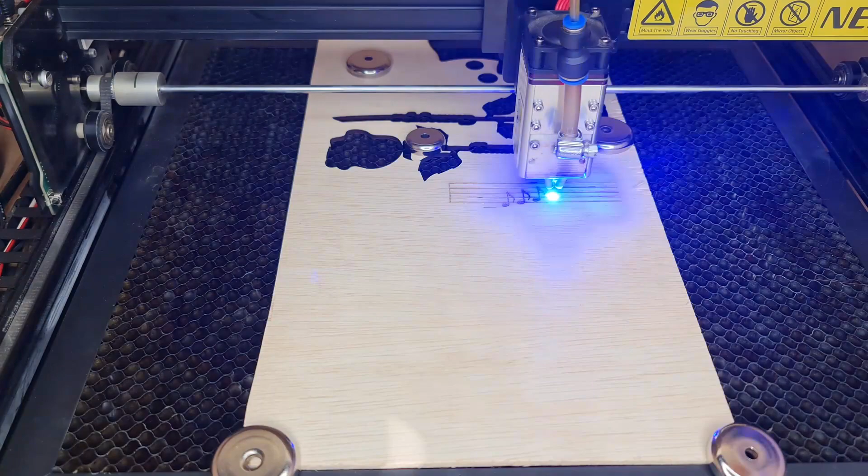Today I'm going to show you how to resume or recover a project after a power outage or any other kind of failure in LightBurn. Without further ado, let's get into it.

Before getting into the actual process, I just want to emphasize that at the time of recording this video, there is no proper method for recovering a failed project. So what I'm about to show you is basically a trick that works and can help you recover at least some of your projects.

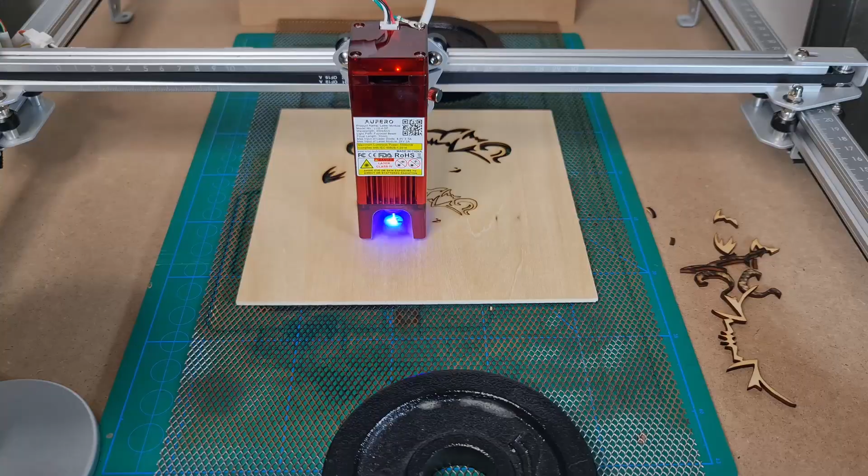Now, let's try to highlight the problem. You're running a project and suddenly you get either a power outage or a disconnection, or simply the machine stops for a random reason that goes beyond the scope of this video.

Now, the sudden stop is uncontrolled. That means that the axes are not slowed down and stopped in a controlled manner, but de-energized at once. And so this causes the machine to lose velocity and eventually stop somewhere without the ability to keep track of its position. This is actually the difference with pausing.

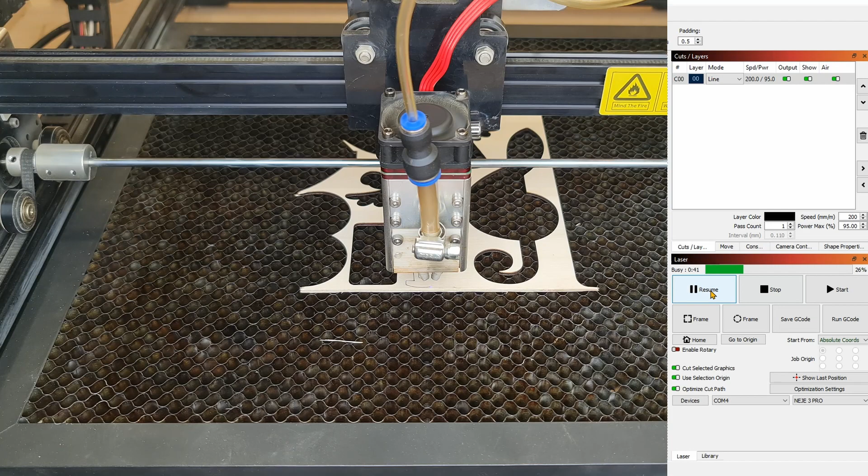When you click the pause button to pause the execution of a project, the controller sends the signal to the stepper motor to slow down in a very controlled manner until it stops. Despite these small machines not having feedback, the controller is able to remember the position. And thanks to that, you are also able to resume.

Currently, laser engravers do not offer a way to resume a project the way 3D printers do. At the same time, LightBurn does not offer that functionality either. Hopefully newer machines will come out with some way to resume projects, and LightBurn will also align to that. Despite LightBurn not offering the recovery option just yet, we can take advantage of the preview window, something that in my view is very powerful.

Using the preview window, we can basically try to reposition the machine and restart where the job or the project stopped. Now, the procedure changes a little bit depending on what type of machine you have.

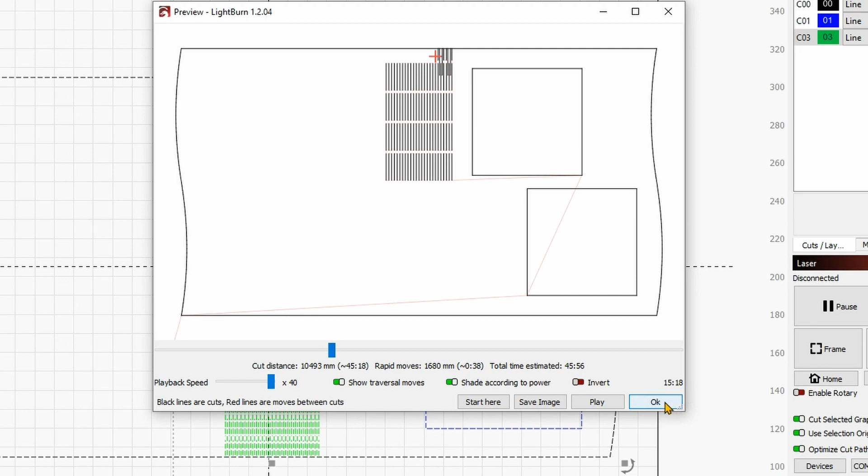In particular, if your machine has a home, that is micro switches representing the origin of the coordinate system, and if it doesn't. Let's start with a machine having a home, meaning micro switches that allow the machine to return to a fixed known position.

When working with this type of machine, I normally recommend, and it's very important, to work in an absolute coordinate system, and before starting a project, to always start from home.

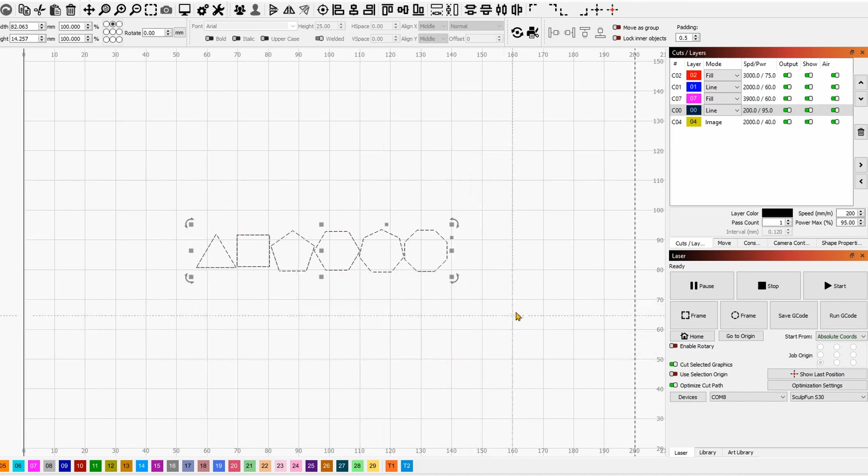So once you have your project selected, you frame it — this will show where the project is supposed to come out. Before actually clicking the start button, it is highly recommended to home back, and then click the start button from home.

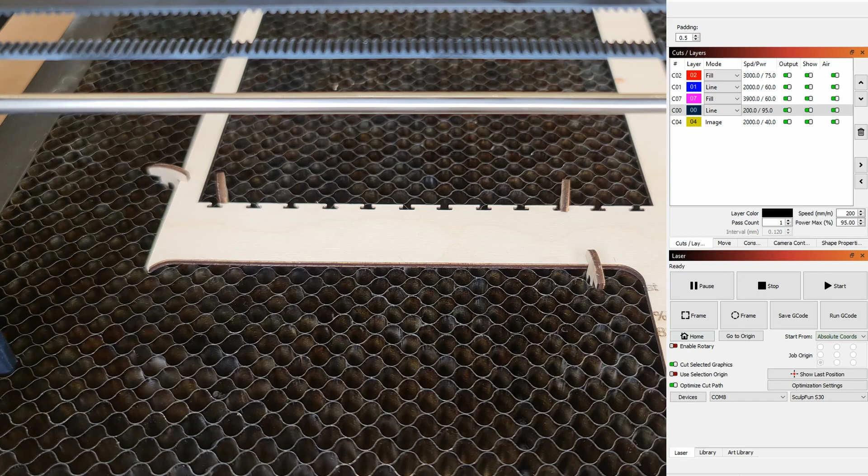This is because while the machine works between cycles, it loses accuracy over time. So starting from the home position will make sure that the precision, the accuracy, is the highest possible at the moment. Now let's start with something pretty simple and straightforward.

These are a bunch of individual shapes. By the way, in order to work only with what you have selected, make sure that you have 'cut selected graphics' toggled on. So let's go for it.

I've already homed the machine, I have already framed it, and let's click on start.

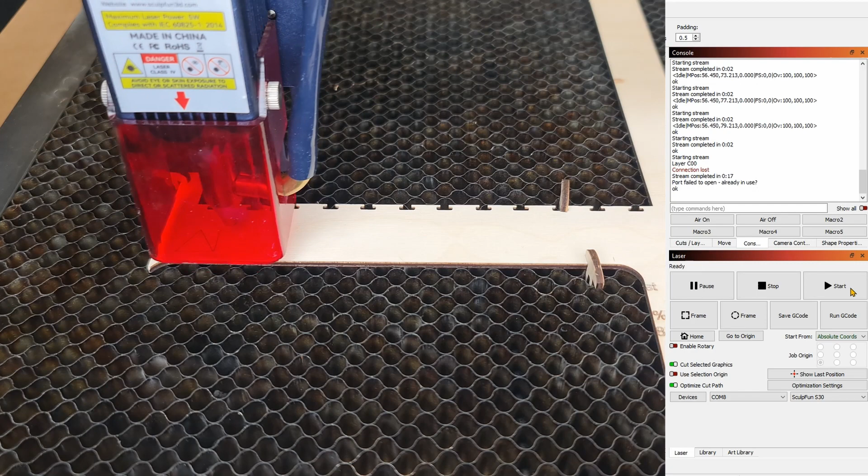All right, so now I'm going to simulate a power outage. There we go — I've disconnected the cable, which you can see over here, and now I'm going to reconnect it. This will auto-home, because obviously I didn't have a real power outage, so my PC is currently still working.

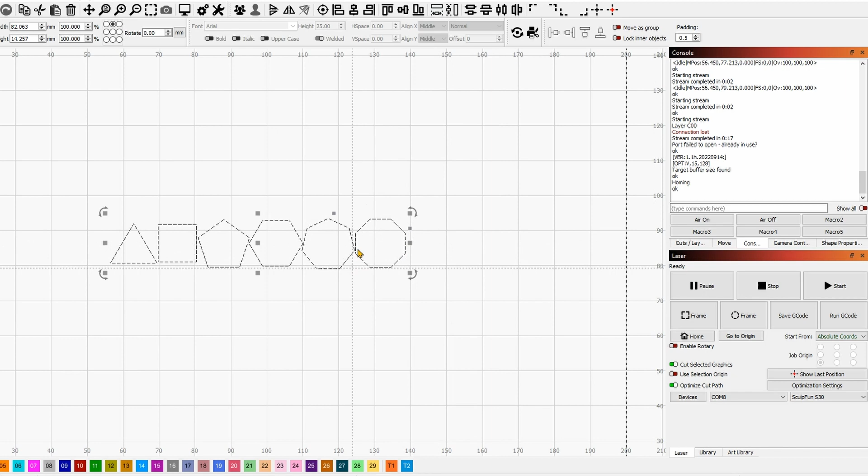Now you get feedback in this case that there was a USB connection dropped. There is some hint here on what you can do, but not exactly how to recover, so I'll simply click 'no'. Now, what you could do in this instance — first thing first, once you reconnect everything, make sure that you home the machine.

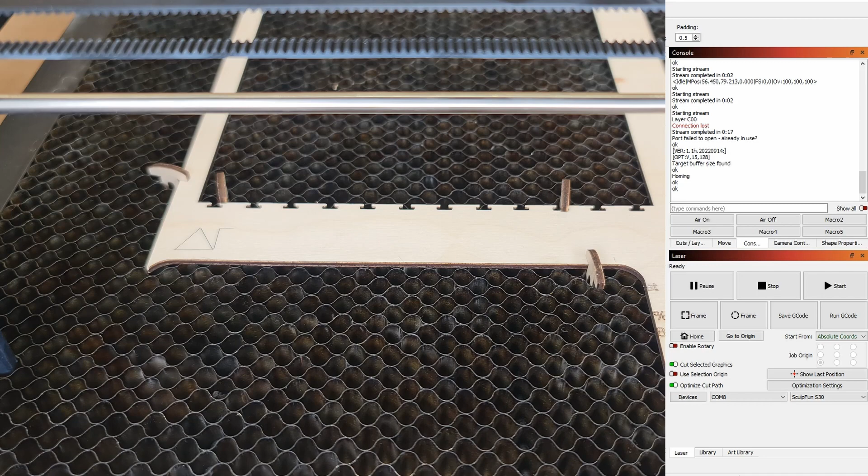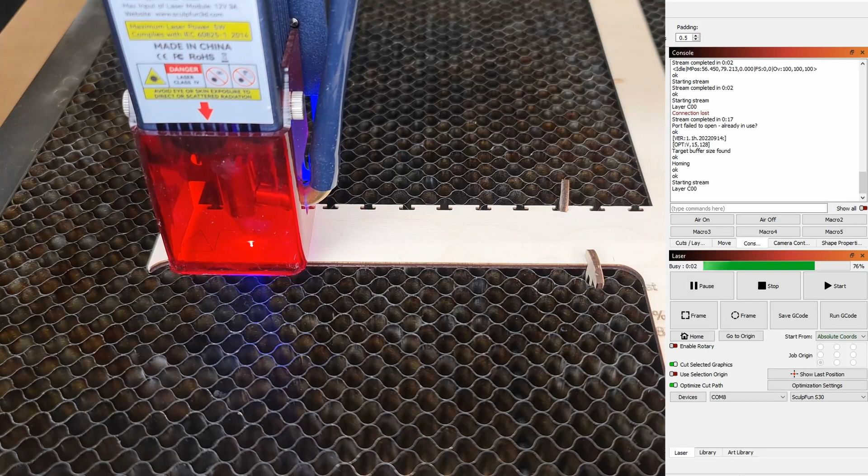In our case it was already homed. Now have a look at the condition of your project, the status - where did it reach? Now I know that this was the object being cut or worked on at the moment of the failure. So what I can do very simply is select the remaining ones and click start and let it finish working. By doing so, there will be only a small percentage of the project that actually fails.

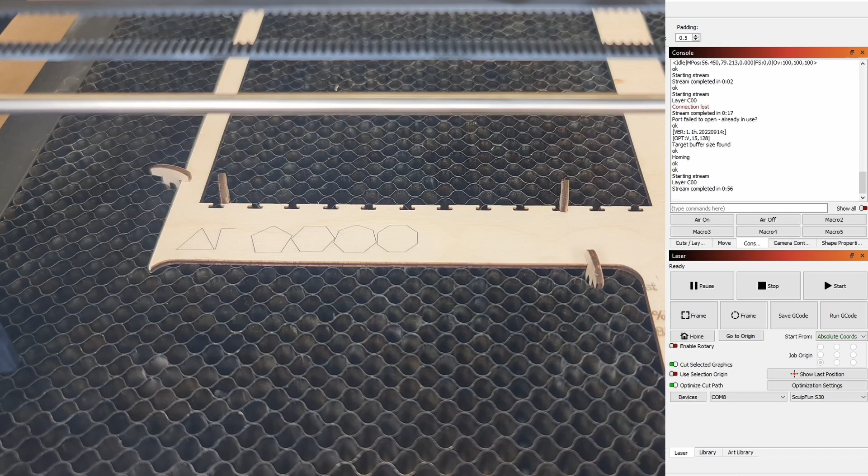All right, so as you can see, we have our project recovered in large percentage. However, we can actually recover this entire project, but I'm going to show you the procedure with a more complex project - one with both engraving, fill engraves, and cutting.

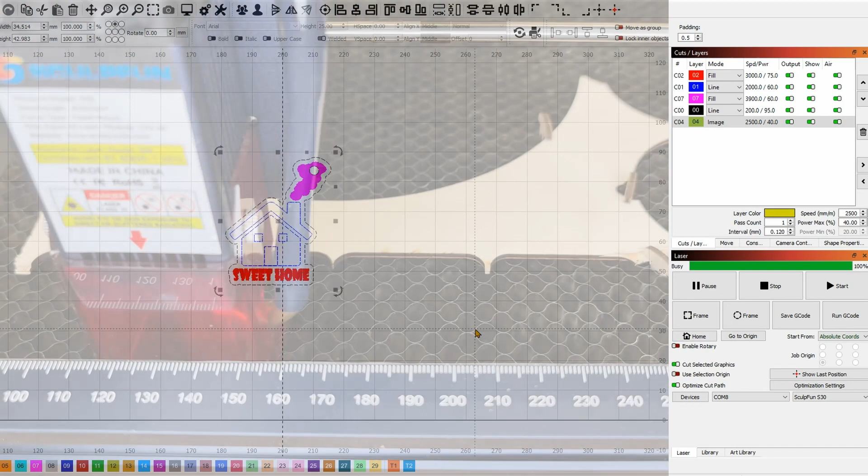Once we framed it, let's once again not forget to home the machine. Let's always have our origin. And now we can click on start.

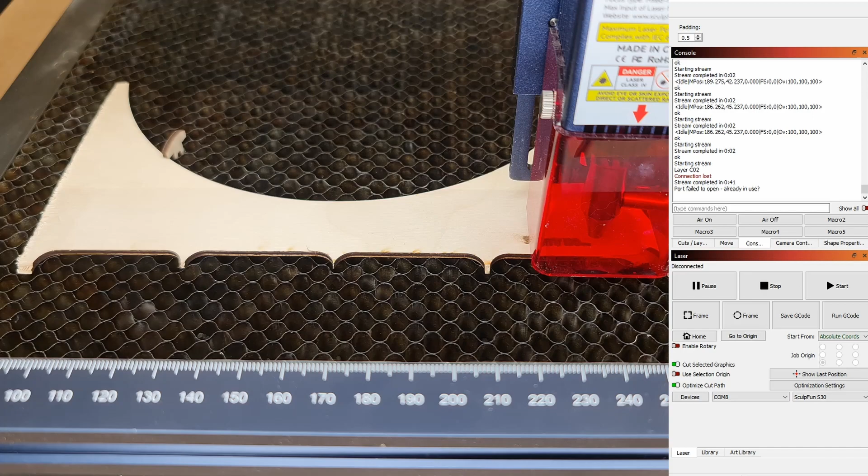All right, let's randomly stop. Now before reconnecting everything, let's try to see where it is - just like this, let's try to identify where it is. And now let's plug back in. If your computer didn't shut down, this will automatically reconnect and home the machine for you.

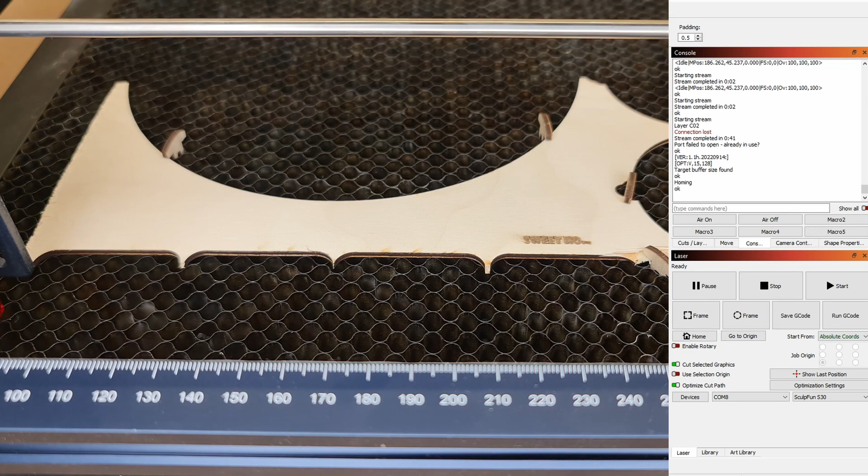And now we need to check exactly where we are in the project, so let's take a closer look. You can see here, with 'home' - we were just engraving the M of 'home'.

Back to LightBurn, as you can see we get the message. Just click on no. Let's select our project and preview it once again. So we said we are approximately at the M of 'home'.

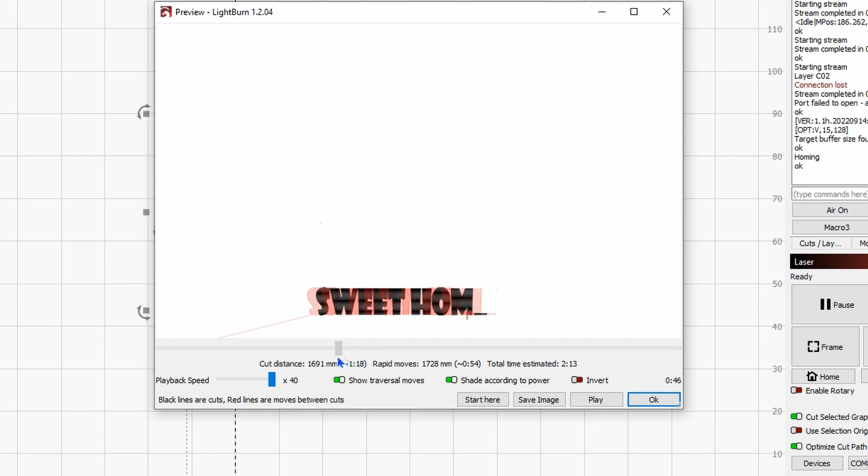We have to now understand exactly where we are. In my opinion, we are somewhere here, so I think I can give it a try. And so, click on start job on laser from here.

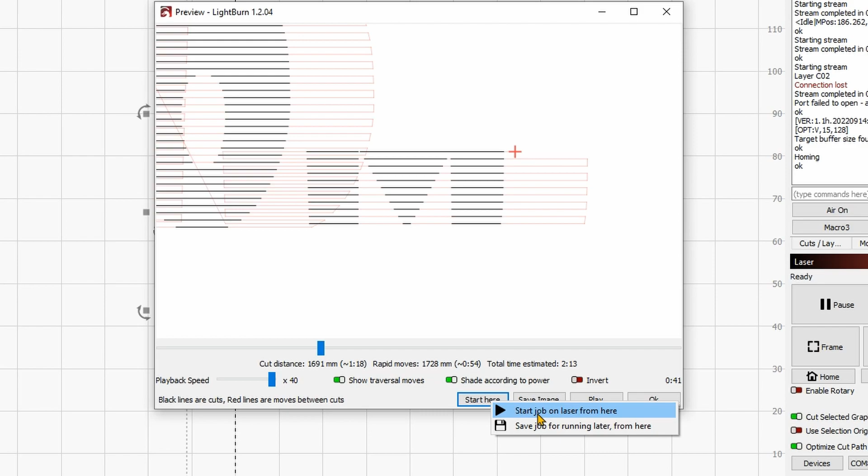Now, as usual, let's not wait for the entire project to finish. Let's let it run for a while and have a look if things are good. If they look fine, we can leave it to run because the project is actually okay. I can see there is a tiny defect, but it's not much visible, so I will leave it to work.

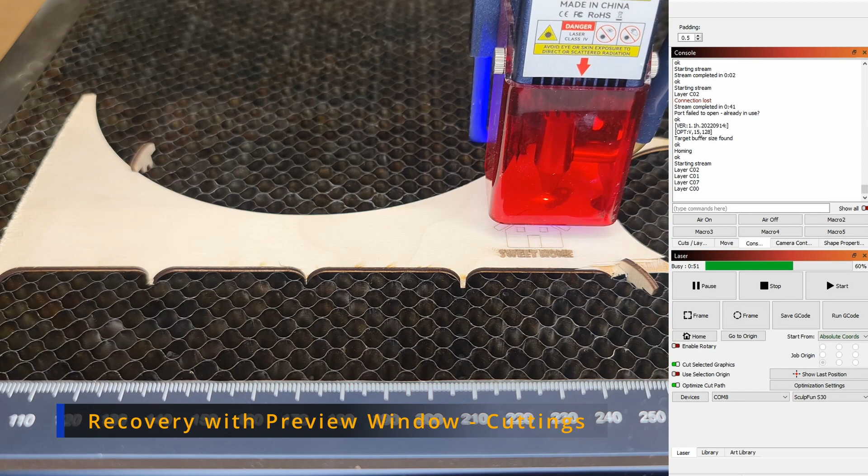All right, so let's now randomly disconnect, and let's reconnect.

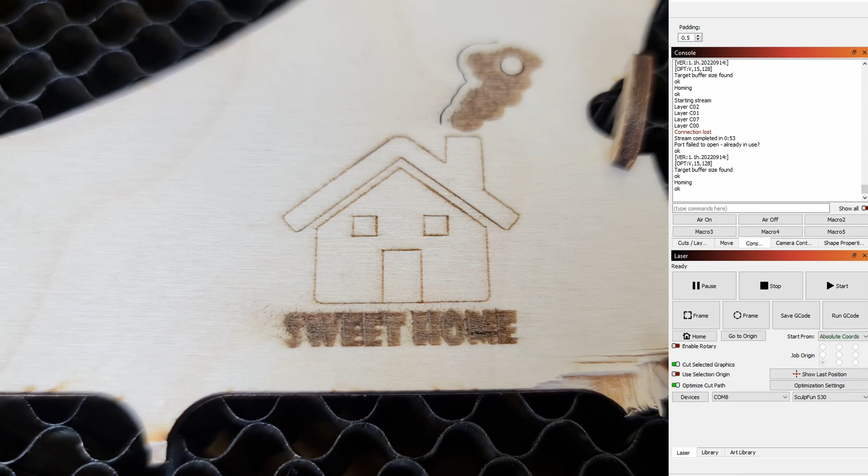So let me give you a closer look. This is where we are, you can see over here. So we will now try to reposition ourselves there. Try always to get some reference point so you can understand in the computer where you are.

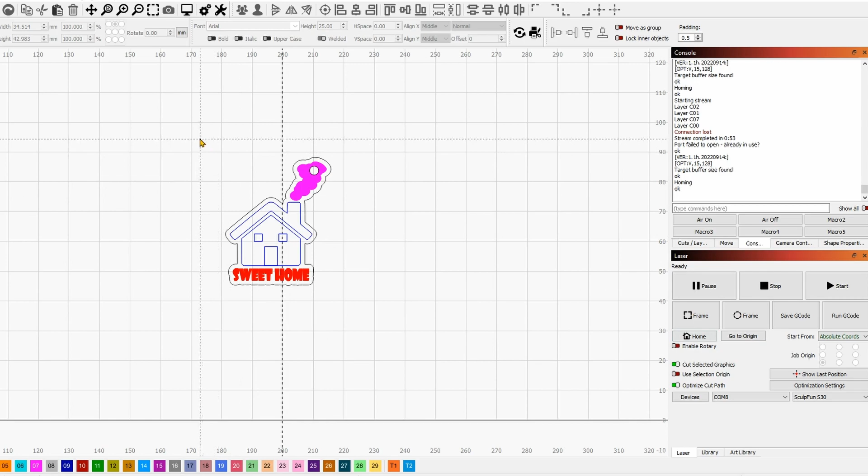So back to LightBurn, click on OK. Now again, the machine has already homed, otherwise you would have homed it yourself. Now click your project, preview, use the slider to locate where you were. Now it seems like we were here, okay?

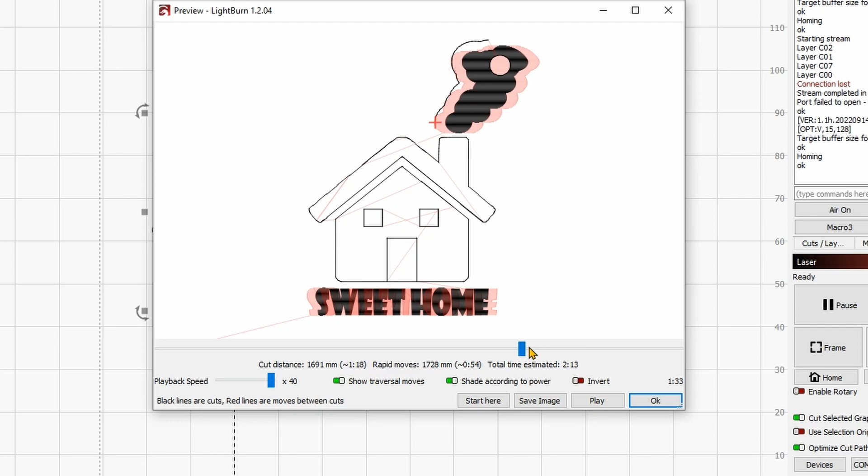So like we were at this point, in this location. Now since it's a cutting, you can retrace a little bit more - that will not be visible. So I'm thinking to start somewhere here, maybe like this. Let's use the scroll wheel on the mouse so we can fine tune it. Okay, and once you're happy with it, start job from here.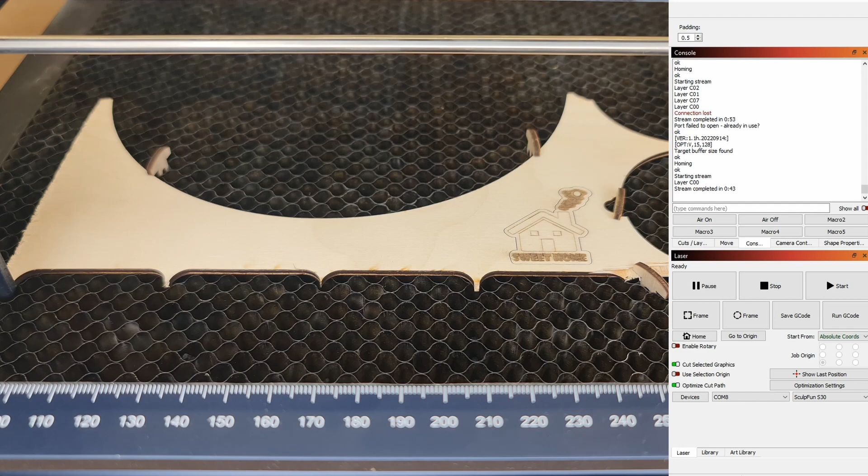All right, let's see now what happened. So far, I don't see any defects.

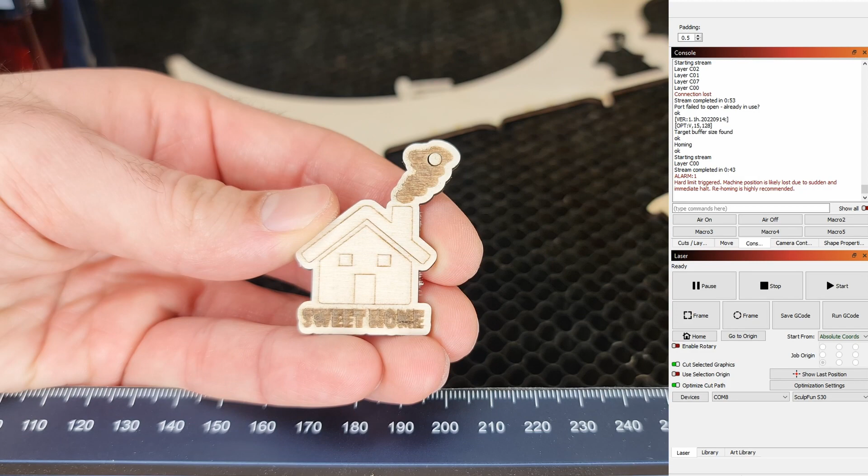And we can try to also break it. You can see over here that this project has failed twice, and we are almost unable to recognize the failure points. At least for the cutting, I don't see anything. For the small E of 'home', there is a slight imperfection - I don't know if the camera can actually render that. But overall, I don't think it's going to be something noticeable.

All right, so now we are going to try to recover the hardest type of project, and there is an image. Now, the reason it is hard is because it is hard to actually pinpoint where exactly the machine stopped. This is highly dependent on the type of image, the amount of details, and the resolution. But we are still going to give it a try so you can see how I would work around that.

Now, important here is that you will need to set your image layer. When you double click on it, you will need to set it to fill shapes individually. This is going to allow you to use start job from here, from the preview window. Okay, so let's give it OK.

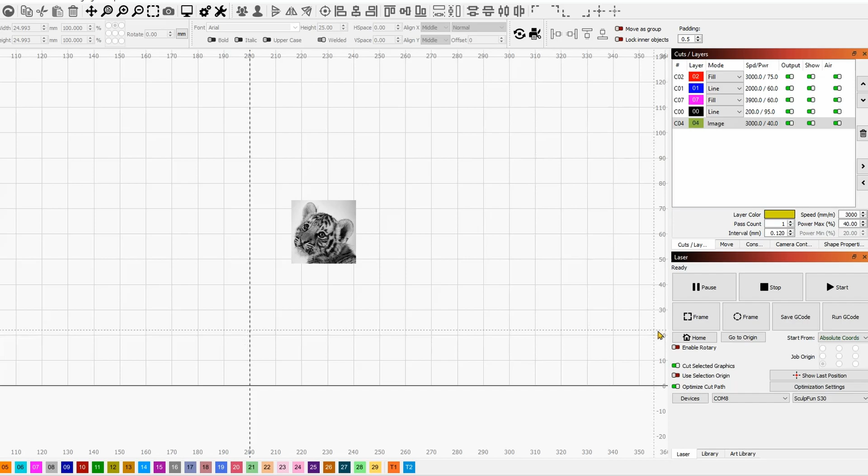Now, don't forget again to home the machine before everything. Once you're ready, select it and click on play or start.

All right, so now I'm going to stop it at a random location. Again, here is the cable. And let's reconnect.

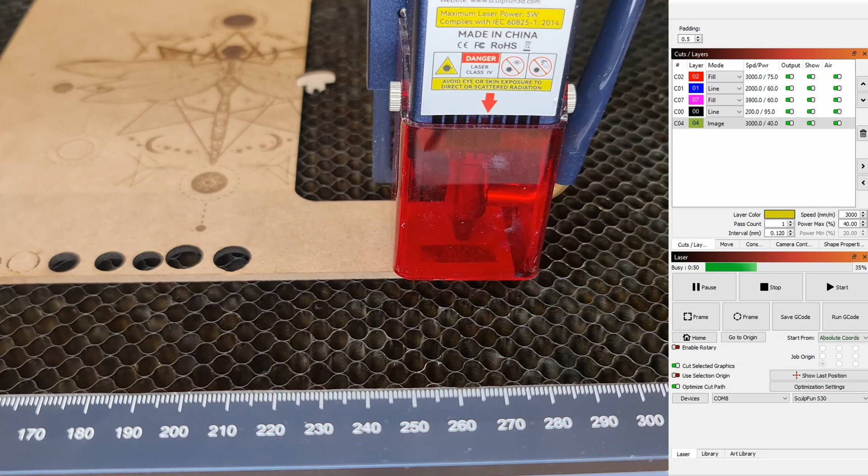Here it is very important to have a look at the project and try to pinpoint the exact location where the machine might have stopped. Okay, let's go have a closer look.

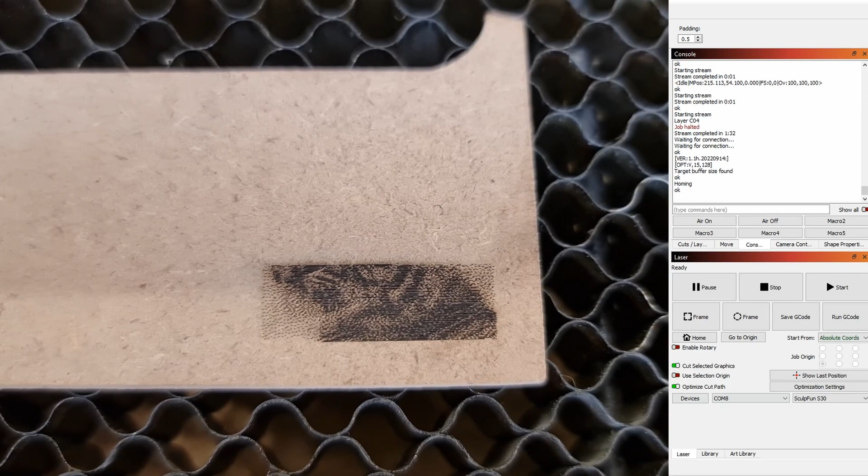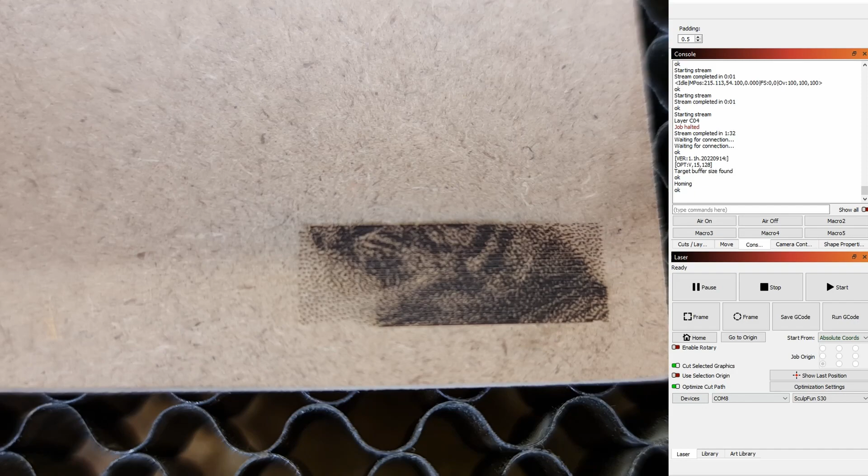All right, so this is the current status, that's where we arrived. I can see a little bit of the fur on the nose here, and I think I can see the part of the nose and a small detail over there. But we'll need to try to figure out small details that we can use ourselves to position the cursor on the screen. All right, so back to LightBurn.

Let's select the project, let's preview it, and let's use the cursor over here. Now I see a little bit of this fur or hair, not sure how to call that, and some detail over here, over to this location. I will try to be as precise as possible.

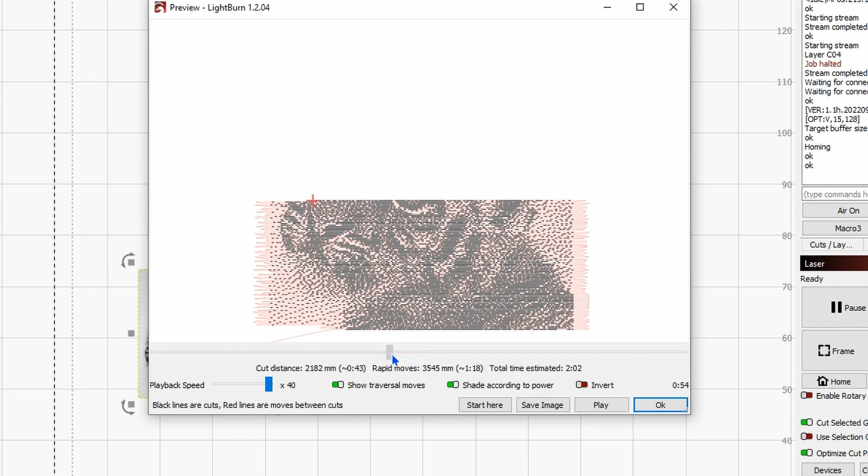Now bear in mind that here you might end up with three situations. You're lucky and you pinpoint the exact point, so you will not have a noticeable difference. Second is that you will have skipped lines, meaning you picked up the wrong line and skipped some. Third is that you will have a burned line, meaning you are going to trace back a line that was already engraved before the machine halted or stopped.

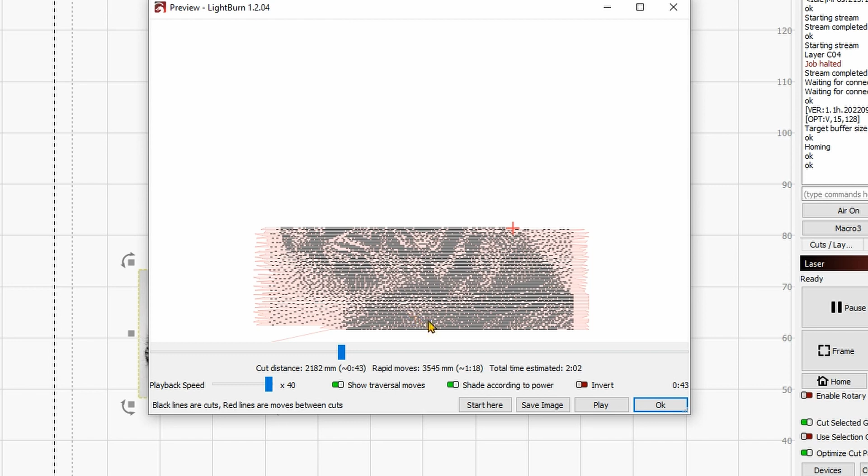Okay, so this is unfortunately the problem with the images, but still let's try to see where we can, maybe somewhere here. Let's see what happened. So, start job from here.

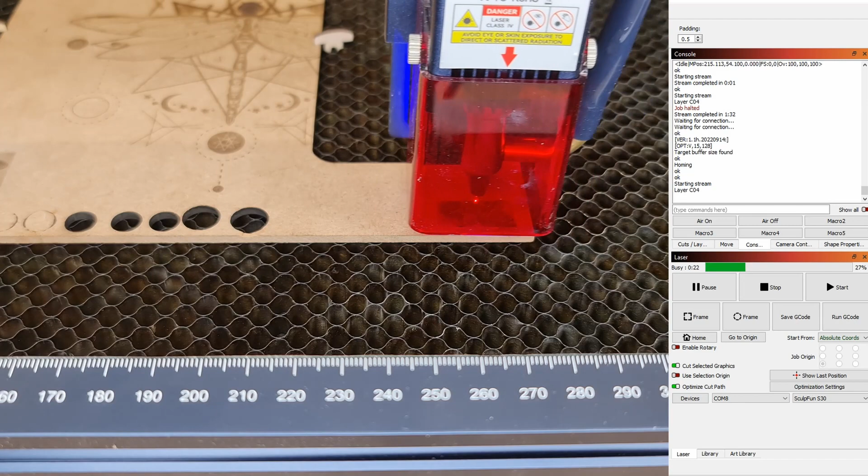Now again, let's try to have a look at what is going on. Let's leave it to work for some time and try to figure out whether the project is being executed correctly without visible abnormalities. If it does, we'll leave it to work, and that means we save the project. If it doesn't, unfortunately there is not much that we can do.

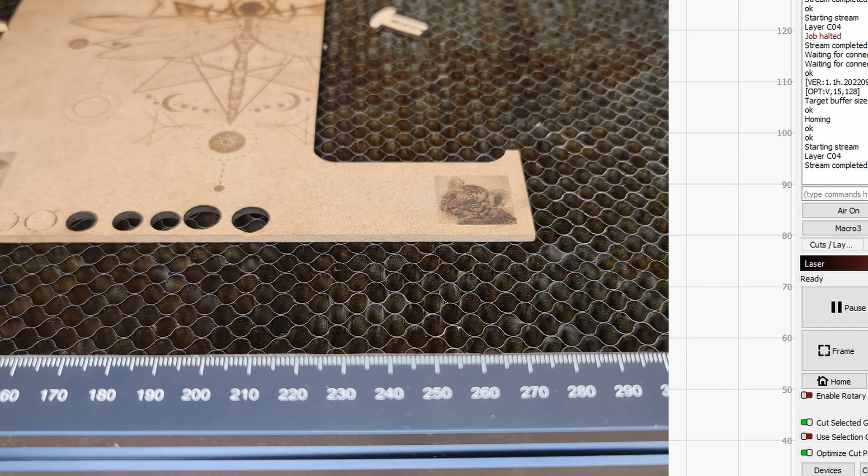Right, so from what I can see here, all seems good. Now we are going to have a closer look. I don't see any noticeable defect, which means that we've been very lucky.

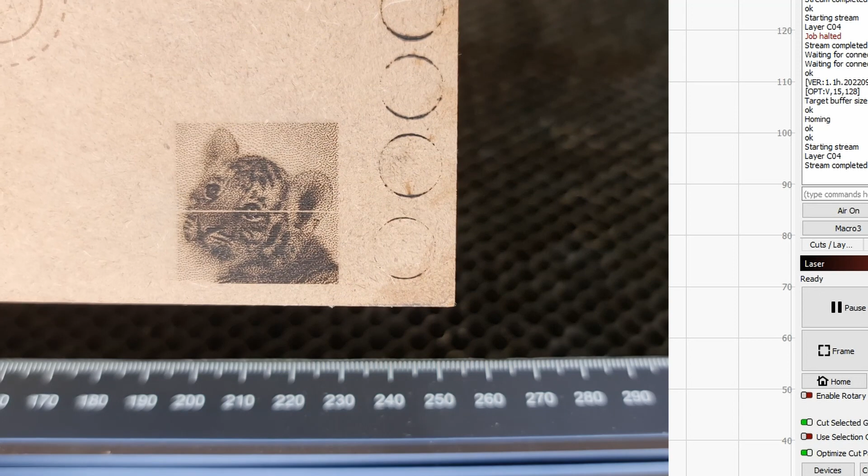I will show you the previous one that I was trying for this video tutorial, and as you can see, I skipped one of the lines. I could have also tried to recover that, but unfortunately when the laser head backed up, it hit onto one of the clamps, which shifted the sheet, and so the entire project was ruined, because realigning it is a nightmare. But here, as you can see, we got very lucky and the project is clean. I mean, I don't see any defects there.

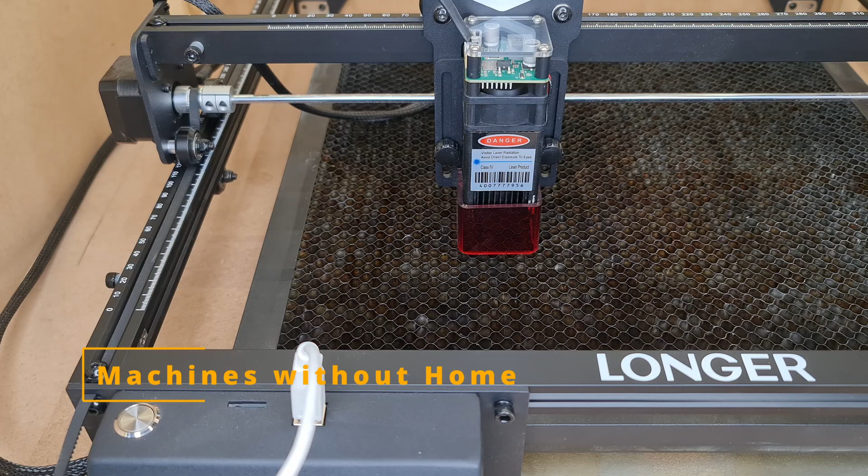All right, how about recovering a project with a homeless machine? That is a machine without micro switches, which means a machine that doesn't have a fixed reference point. Now, rather than showing you how hard it is to actually recover a project in that kind of situation, I'm rather going to give you and show you some recommendations on how to work with a homeless machine, so that you can apply the methods I showed you earlier for a homed machine.

Now, the first method is to try and let your machine work like if you had the home. It is true that you don't have micro switches, but it is also true that you have a physical frame that represents the boundary and therefore the physical limitation of your axis, which can actually be used as a reference point. So what you can do is work in user origin as your coordinate system. And when you start your machine, you can either move or jog your machine to a corner, let's say for example the bottom left corner, so that you have this physical contact representing your machine's 0 position.

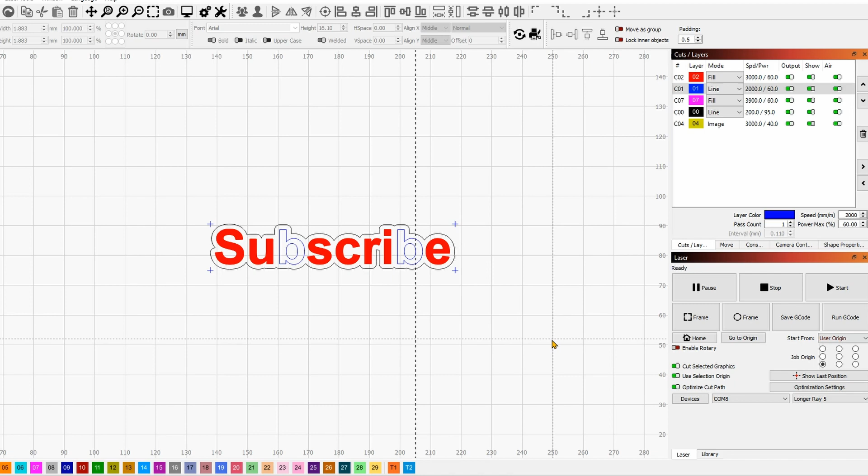So you could either go to the move tab and jog this down until you actually hit the frame, or you could manually move it. So you can go down, and as you can see, I've touched already, and there we go. Now I'm on the corner.

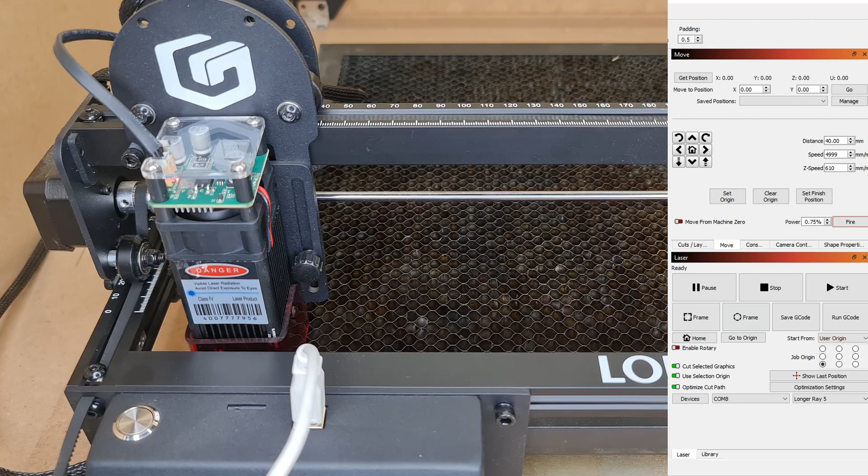And I can come over here and click on set origin. Now we can use our user origin, so we can randomly jog somewhere, and then rather than clicking home, which isn't enabled anyway, we can click on go to origin.

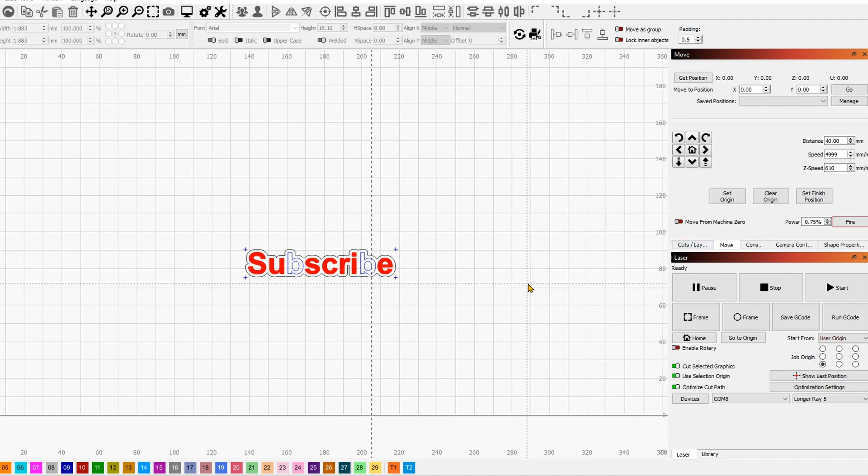Once you do that, before you start your project, or anyway once you start your machine, it is going to act like you have a homed machine. However, if you want to work in the current position, meaning you want to move the laser by hand, then I suggest you create corners outlining the bounding box of your project.

So when you select a project, I can select now only the outer part, you will have a bounding box represented by the minimum and maximum in both directions. That is what the machine is going to trace out when you click on the framing button.

So what you can do is manually create this simple axis, just to draw them. And then you can put them in an independent layer. That's what I suggest you do.

Then you come over to the layer and move the layer to the top, so that is going to be first, because you want to make sure that whenever it fails, you will already have your locations here.

So what happened here now, if we highlight it all and go to the preview, you will see that these are the first part that are going to be engraved.

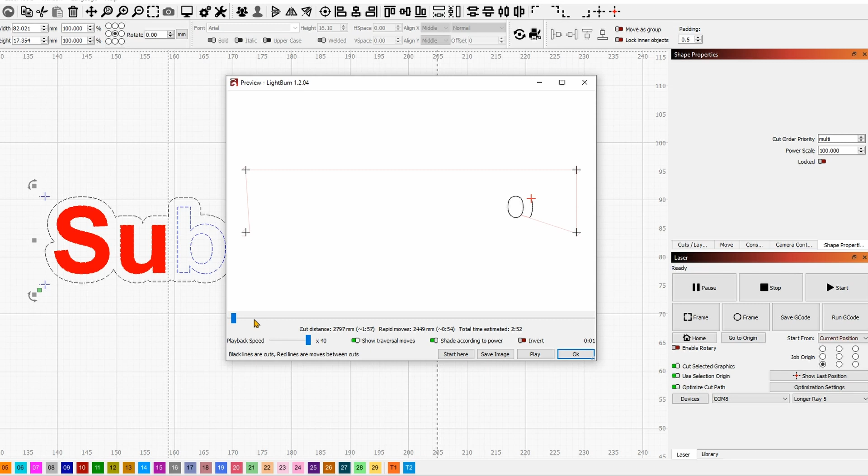So now, if somewhere around, this is going to stop for some reason, it's going to fail, you can jog or move the laser so that it points to, for example, the bottom left corner.

And to do that, you can use the fire button here. You can position yourself by jogging to one of the corners, and then try to frame it. You can eventually reduce the speed, the framing speed, which is over here, and try to see if you are exactly where you're supposed to be.

And you can use the trick I showed you earlier: select everything again, come over here, and see where the machine stopped. So once you're ready, for example if it stopped over here, you start from here, and you should again get a similar result like we did for a homed machine.

So this is the way you go about it. It is not the perfect solution, but it does the job, and I've been recovering many projects, including ones that happened to shift and move around. But when you end up in that situation, you have to understand whether it is worth the time you're going to spend to actually realign and do the whole process.